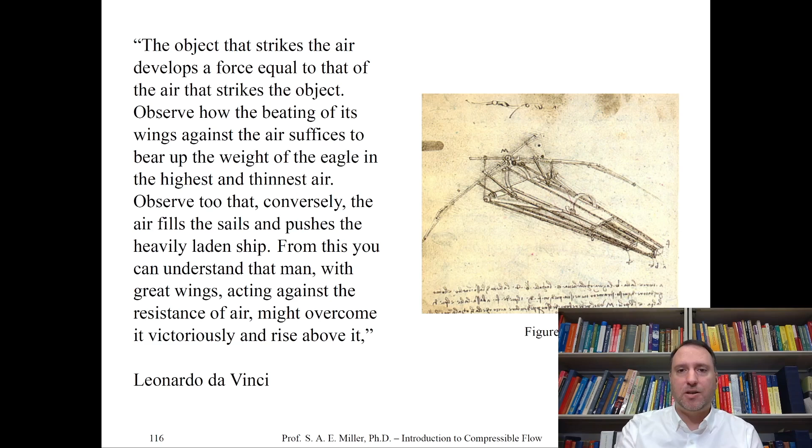Remember, let's define fluids. A fluid is any substance that deforms continuously under a shear stress. Any matter that deforms continuously under any shear stress is a fluid, by definition.

Here, in this class, fluids consist of liquids, gases, and plasmas. We'll talk a little bit about plasmas, very little, but our class is mostly focused on gases, which have higher compressibility, as we discussed, the compressibility factor tau.

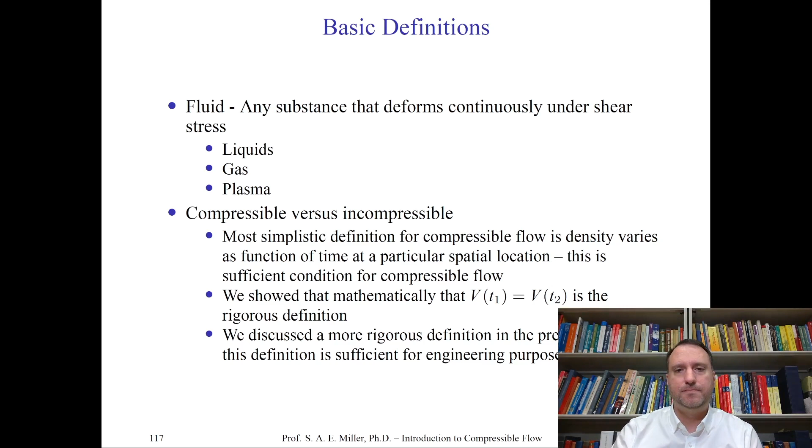Generally, liquids, just generally, not always, have much less compressibility, and so we won't consider liquids too much in this class. Now, the most simple definition of a compressible flow is that density varies as a function of time at particular spatial locations.

This is a sufficient condition for the compressibility or incompressibility of a flow. But we showed in the previous class the most rigorous definition is that a fluid parcel maintains its volume as it is deformed in space.

You can imagine that any infinite choices of fluid parcels in a fluid flow through space and time, which do not change their volume, would be considered an incompressible flow. We will not be interested in this assumption at any point through this class, except for a few examples done to counteract our fundamental ideas.

In the previous class, we showed that the volume at time 1 equals the volume at time 2, which indicates an incompressible flow for fluid parcels. That doesn't mean the control volume isn't changing about the fluid parcel. Informally, you can say the density is changing in the fluid. We discussed more rigorous definitions previously, but this will be sufficient for the rest of the class, though it's not very rigorous.

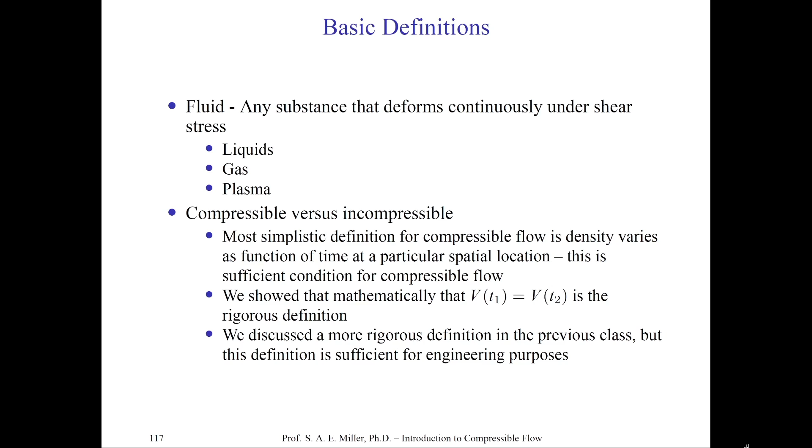Now let's talk about supersonic versus subsonic flows: supersonic, transonic, and subsonic flows. Remember, specific regions of the flow field might have the property that M is greater than u over c. Here, Mach number is defined as the local speed of the fluid divided by the local speed of sound.

There's also a global Mach number, which might be the speed of the aircraft divided by the speed of sound at the altitude of the aircraft in the undisturbed atmosphere. So mind these definitions: M equals u over c, where u is the speed of the fluid and c is the speed of sound at one point. Therefore M can change anywhere in the fluid, spatially and temporally.

If M equals 1, this is the so-called transonic condition, meaning M equals 1 equals u over c, so u equals c at M equals 1. This is the singular point between subsonic and supersonic flow.

Subsonic flow is where M is less than u over c, and supersonic flow is where M is greater than u over c. Typically, we do not discuss negative Mach numbers; Mach number is a scalar positive quantity.

Transonic flows may also exist anywhere M is not equal to 1. In fact, transonic flow might be seen as a class of flows with supersonic and subsonic regions mixed in the flow field. There are usually trivial solutions where M equals 1 everywhere in the governing equations, the transonic condition. We'll find later how difficult transonics is, requiring special mathematical attention.

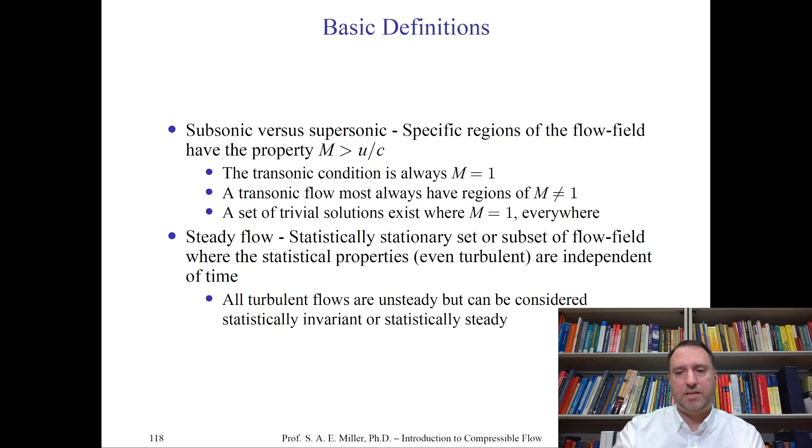Let's now look at the idea of viscosity. Viscosity is the shearing force when you shear a fluid—it's the resistance of the fluid to shear. Of course, viscosity plays an important part in the stress tensor, which we defined not long ago.

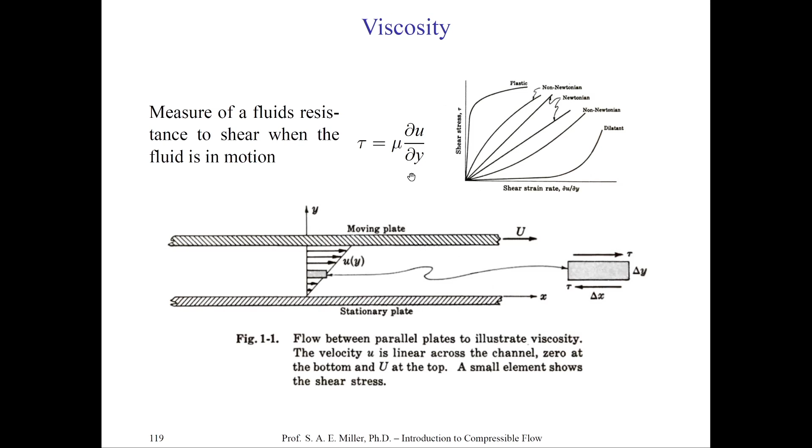Let's talk about the difference between laminar flow, transitional flow, and turbulent flow. Laminar flow is like a laminate. Perhaps you've seen wood laminate, or you've looked at very slow speed fluids and put in some dye, and you see that the flow moves like a laminate. You can imagine having parallel parts of fluid in parallel volumes, and they just move across each other without ever crossing each other's streamlines. This would be an example of laminar flow.

It's smooth, non-chaotic, and there's no real fluctuations in it. That's laminar flow. We might draw parallel streamlines in a uniform flow without fluctuations, and that would indeed be laminar flow. So you can have high-speed laminar flow or low-speed laminar flow.

Now, sometimes laminar flow profiles have inherent instabilities in them. Just like a dynamical system might be unstable and go into chaotic motion eventually, a fluid can be unstable. That is, the laminar profiles of velocities might contain instabilities, and a perturbation, like a small wave or vibration, will send the system into a chaotic state, which is turbulence.

So flow going under an instability from laminar to turbulent, or alternating between laminar and turbulent states, is called a transitional flow, because it's transitioning from laminar to turbulent flow.

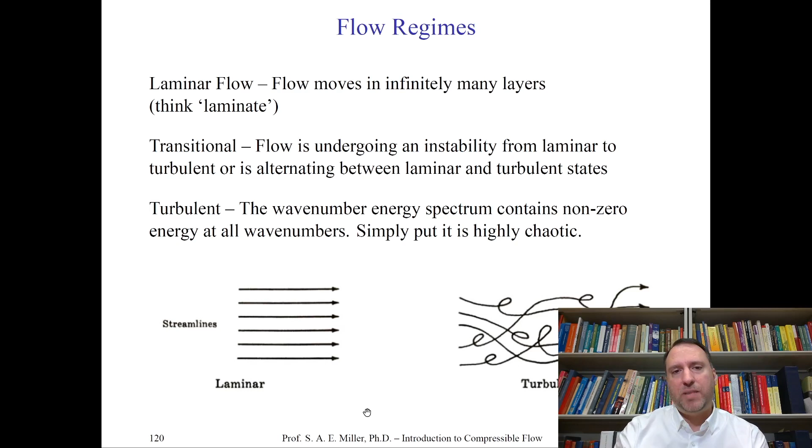A turbulent flow might be defined as one which is fully turbulent when the wave number energy spectrum contains non-zero energy at all wave numbers.

Imagine I have a turbulent velocity field, and I take a Fourier transform in the x, y, and z directions. I can now plot the Fourier transformed energies in wave number space instead of physical space. If they are non-zero, I can show that the flow is turbulent. This is a very mathematical definition.

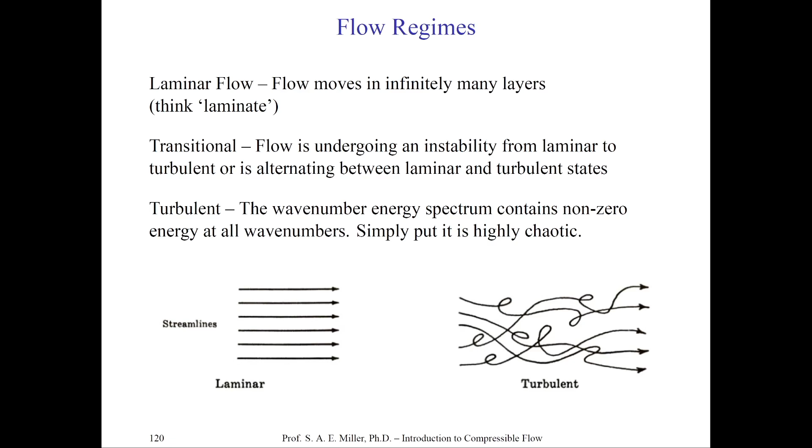A simpler, more physically understandable definition is that turbulence is highly chaotic. You probably know what it is: cigarette smoke, clouds in the sky, water in rivers, and sometimes the airflow in our lungs and breath are all turbulent flows. Aerospace engineering is no different—in fact, we should expect most aerospace flows to be turbulent in nature, and this is quite difficult to handle.

Generally in this class we'll look at flows with very low to no turbulence. The subject of turbulence will be treated in other classes, perhaps at the graduate level. We'll study these flows assuming little to no turbulence so we can solve these equations. Generally there are no analytical equations for turbulent flow, so we'll try to develop analytical equations and methods for flows which are not turbulent.

There's another classification called external versus internal flows. An external flow might be one which is unbounded, while an internal flow is one bounded by boundary conditions, such as solid walls.

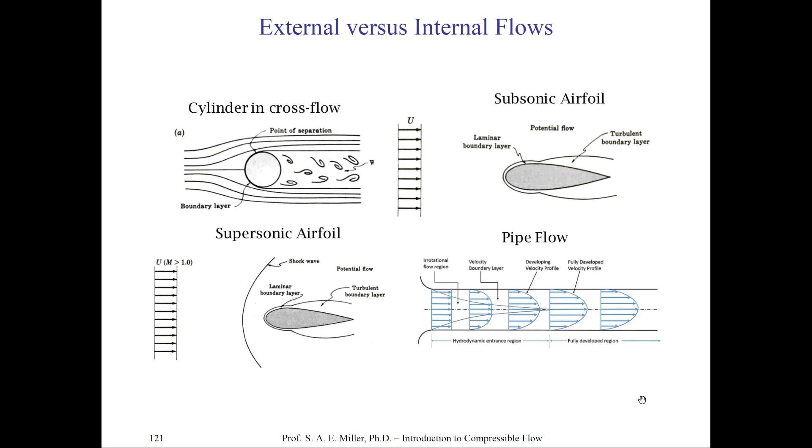You can probably think of many examples of internal and external flow. But at the end of the day, the equations of motion are exactly the same between internal and external flow—it's just that they have different boundary conditions, which gives them unique properties in the final solution of the field variables.

Let's review our differential form of the continuity equation, the conservation of mass equation developed in the previous class as equation 73. Let's read it together: partial rho partial t plus partial xi of rho ui equals 0. This means the change of density in the fluid at a point with respect to time is balanced by partial xi of rho ui—almost like the divergence of rho ui balanced by the time rate of change of mass in the fluid.

We can also write equation 73 from Einstein notation into vector notation as 74. You can see partial xi of rho ui is nothing but nabla with the inner product of rho u in the second term of 74. We can expand this into Cartesian form or any coordinate system we desire—for example, 75 is the Cartesian form of 74: partial rho partial t plus partial x of rho u plus partial y of rho v plus partial z of rho w equals 0. That's 73 written in Cartesian form as 75.

What does this physically mean? The first term is the time rate of change of density at a point, plus the derivative in the x direction of density times velocity in the x direction, plus the derivative of density times velocity in the y direction, plus the derivative in the z direction of density times velocity in the z direction—all equal to zero. Now let's make the incompressible assumption.

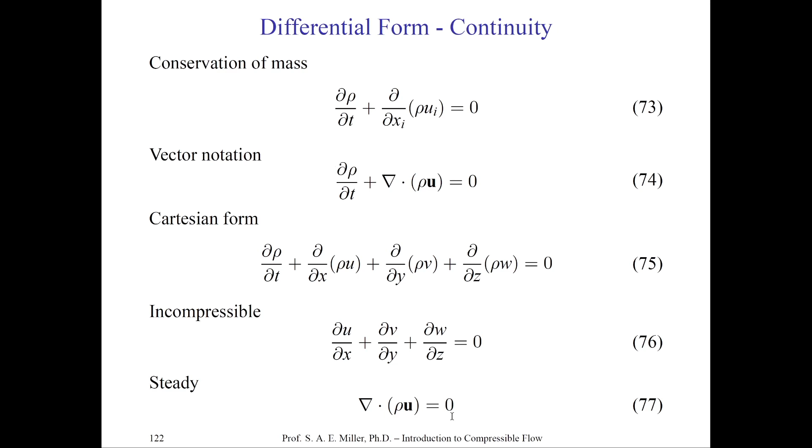We can then further state a steady assumption which is compressible. The steady compressible assumption would be nabla dot rho u is 0, equation 74, crossing out the time derivative because it's steady, so rho can indeed be changing. That's a steady flow, giving us nabla dot rho u is 0. So steady compressible flow and incompressible unsteady flow are indeed two different things.

Now let's return to the momentum equation. Let's show the stress tensor on a particular fluid, pictured on the left. The particular viscous stress tensor is written on the right, with components 1 to 3 for i and 1 to 3 for j. It's also symmetric, as we stated in the previous class.

On the x face of the volume, we have the 1,1 component. On the x face in the y direction, a shear component would be 1,2. And on the x face, we would have a shear component in the z direction—that's 1,3 in Cartesian coordinates.

You can also see the second and third row are the normal stresses along the trace of the tensor, and the off-diagonal terms are the directions in the x, y, and z directions respectively. So the second row is for the y face, and the third row is for the z face. It's simple to draw and remember once you do it once.

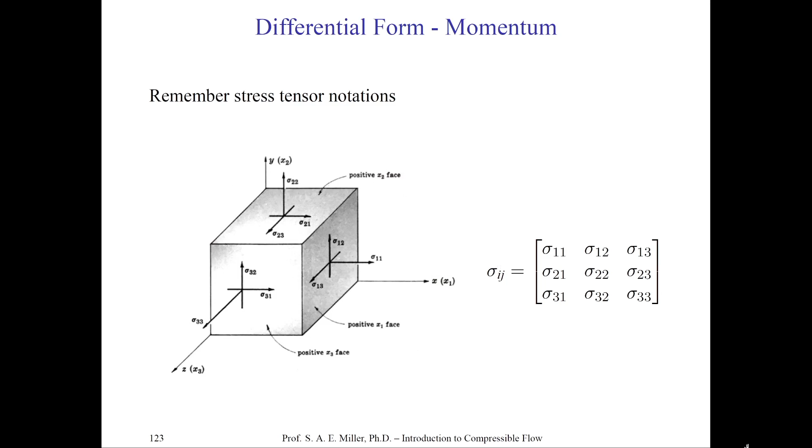Now let's look at the momentum equation in its full form. Naturally, we relate the stress tensor through the first and second coefficients of viscosity in the equations of motion. Here we are in the full compressible differential form of momentum, written in equation 78, in Einstein or index notation.

Rho times the material derivative—it's a vector equation for i equals 1, 2, 3, for the first three directions respectively—is equal to rho times partial ui partial t plus uj partial ui partial xj, which is equal to the right-hand side stress terms plus body forces.

Here we define the stress tensor, which we called Tij in the last class, and here it's sigma ij, as equation 83. Once again, we've written it as the negative of the internal stress, which is pressure, static pressure, times the Kronecker delta function—which is 1 for i equals j and 0 for i not equal to j—plus the first coefficient of viscosity times these velocity terms, plus the second coefficient of viscosity zeta times the Kronecker delta function of partial uk partial xk.

Notice, if we have incompressibility, then partial uk partial xk in the first and second terms of the viscosity are indeed 0.

Now look at the Cartesian form expanded. If we take equation 78 and expand it out for the x, y, and z directions, just like we did for continuity—which, of course, is scalar, but now there's three equations in three dimensions—we can write it out in this full form. For example, the x momentum equation is equation 79, y is 80, and 81 is z.

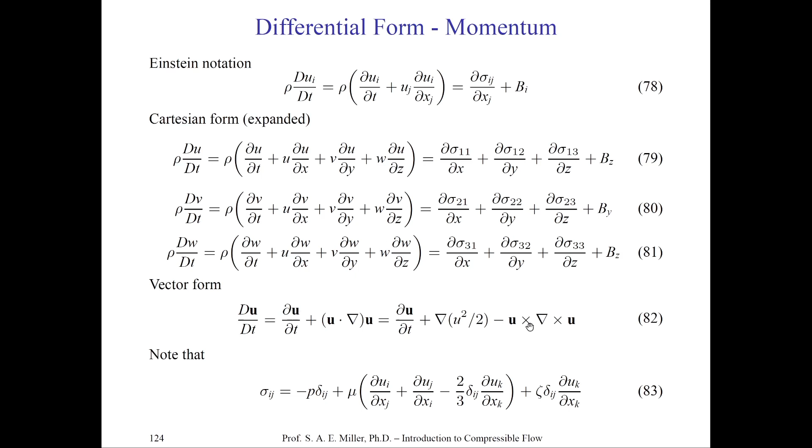You can try and write this out into Cartesian form yourself if you so desire.

Let's now look at the differential form of energy, written for specific energy, little e, which we derived in the previous class. We have rho times the material derivative of e equal to a heat transfer term and body force terms, plus the viscous stress terms doing work on the fluid. I've written down the definitions of these terms here, and I recommend you take a second to follow them.

Once again we made Fourier's approximation, Fourier's law, which works well for many different types of fluids, where kappa, of course, is a conduction coefficient.

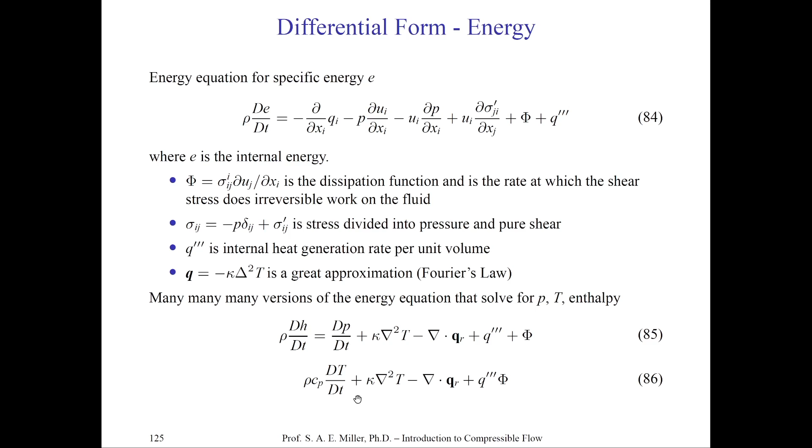There are so many versions of the energy equation. We can write it in terms of enthalpy, pressure, temperature, total energy, or specific energy. I've written two more in differential form, equations 85 and 86, for enthalpy, pressure, and temperature respectively, for your convenience. Take a few minutes and study this slide, paying special attention to the heat transfer term.

And the stress terms. We can also write differential forms for entropy, another law of thermodynamics. This is an inequality law from thermo, the second law of thermodynamics. For a calorically perfect gas and a perfect fluid, we'll say the flow is isentropic, and we'll get into these definitions later - it could be reversible. Anytime you have viscous effects, heat conduction, or heat coupling, the flow will be irreversible, and the entropy law will be written as an inequality.

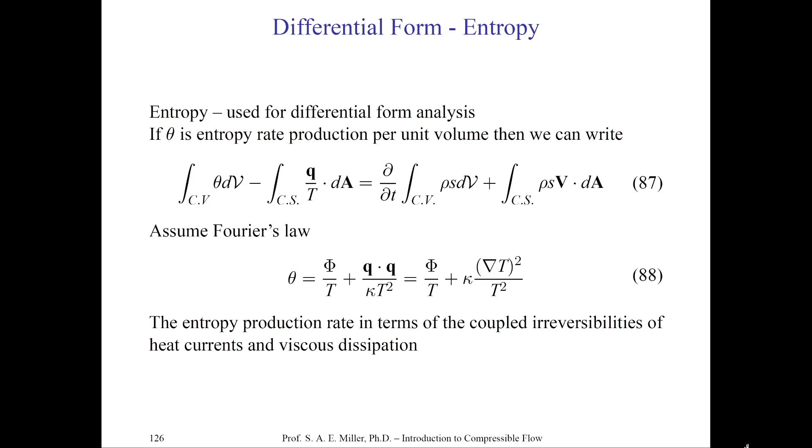So it's not always useful for solving flow equations, but in this class we'll be able to use the entropy equation a couple times as an equality, making the assumption that viscosity is zero.

Let's review the full Navier-Stokes equations once again. We have continuity, momentum, and energy written here - the compressible full Navier-Stokes equations with the energy equation, but no gas law. These are the most important equations because they govern all fluid motion we're looking at in this class and in most classes, except for rarefied flows. We've already talked about these equations in the previous class. At this point you can be expected to write these out in Cartesian form and understand each particular term and its meaning.

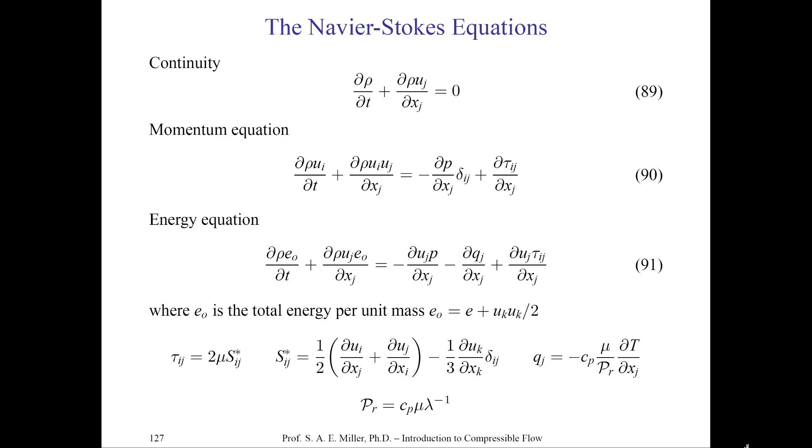Let's start using the following definition for shear stress. We'll say the shear stress is partial uj tau ij over partial xj. You can see this is a type of normalized force - it's a shear force for tau where i is not equal to j.

We can also, from now on, define a total energy, which we'll call E naught - naught meaning sub-0, written interchangeably. In equation 93, the total energy per unit mass is the specific internal energy plus the kinetic energy, that's ui squared over 2. Here we see two i's in a single term, meaning we sum from 1 to 3, so that's u squared over 2 plus v squared over 2 plus w squared over 2, expanded out.

We also formally define the shear stress term. Tau ij is 2 mu times sij, and sij is a half of partial ui over partial xj plus partial uj over partial xi, minus a third of partial ui over partial xi times delta ij, where delta ij is the Kronecker delta function. We also define the heat flux terms with Prandtl number PR and lambda as thermal conductivity.

The ratio of specific heats, which we'll use throughout this class, is gamma. Gamma equals Cp over Cv, where Cp is the coefficient of specific heat at constant pressure, and Cv is the coefficient of specific heat at constant volume. This should be completely familiar from your thermodynamics classes, I hope.

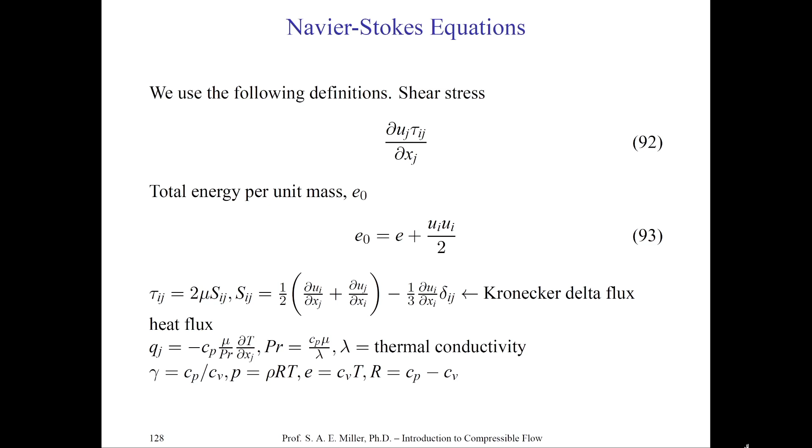Let's turn our attention completely now from the Navier-Stokes equations to acoustics. It is true that all acoustic phenomena that we typically study in aerospace engineering are completely contained in the Navier-Stokes equations, but we'll treat acoustics as its own independent subject. In fact, we can try to derive acoustic equations independently from Navier-Stokes, but we can also take Navier-Stokes equations and derive the acoustic equations more rigorously from the continuous deformation of a Euclidean space.

Let's make some notes about acoustics now. Acoustic waves are extremely important in the aerospace engineering field, especially in compressible flow and fluid dynamics. As I mentioned, the equations of motion we developed completely contain all acoustic fluctuations as part of the solution of the full nonlinear system of equations. We might ask ourselves then, do acoustic waves exist in incompressible fluid? This is something I want you to think about for yourself for a little bit.

We might view and define an acoustic wave as a compression or expansion wave of a fluid. An acoustic wave, or waves in fluids, generally compress the flow or decompress it, which we call expansion. An expansion of a fluid is the opposite of a compression. So fluids are compressed and expand. Through this class, you'll see a theme of wave science where we compress fluid and expand it through particular phenomena like shock waves and expansion waves, respectively.

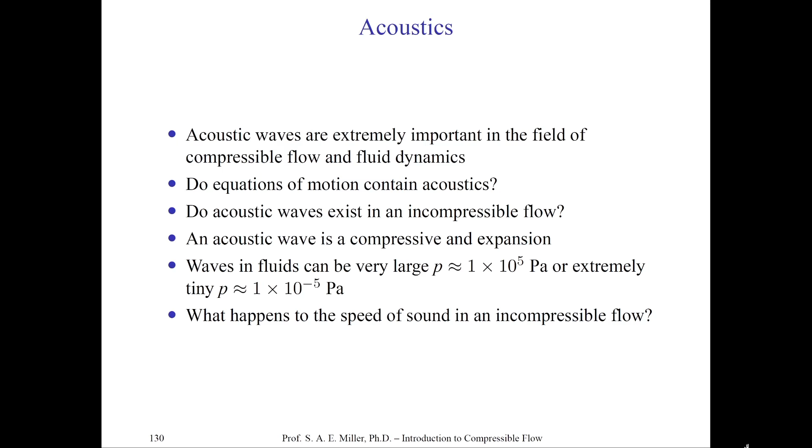Now, what happens to the speed of sound in an incompressible fluid? Would it be 0, infinity, or a finite value?

Let's turn our attention to the Boltzmann equation, and we'll return to acoustics in later classes to try to explain the formation of particular flow phenomena. In Boltzmann theory, which is similar but different than Navier-Stokes theory, we might also define a distribution function f, just like we did way back in the beginning of Navier-Stokes.

We might call that distribution function such that f of 2 volumetric integrals over x and v is an average number of particles contained in a volume element defined by the cube x of a fluid parcel, and a velocity space element we'll call about v at time t. So there's now a new idea of a velocity space element and an actual physical volume. We can then define the number of molecules in a gas as n at any x and t as an integral over f of the volumetric integral over v, the velocity space element.

We can then once again define density as the particular mass times the number of particles, as each particle has the same mass, which is simplified for now. Of course, this is not true in gases where molecules have different masses, like nitrogen and oxygen. We can also define a velocity, which is 1 over the number of particles times the integral of f, which gives us an ensemble average velocity v. So here is the number density of the particles, and m is the mass of a single particle.

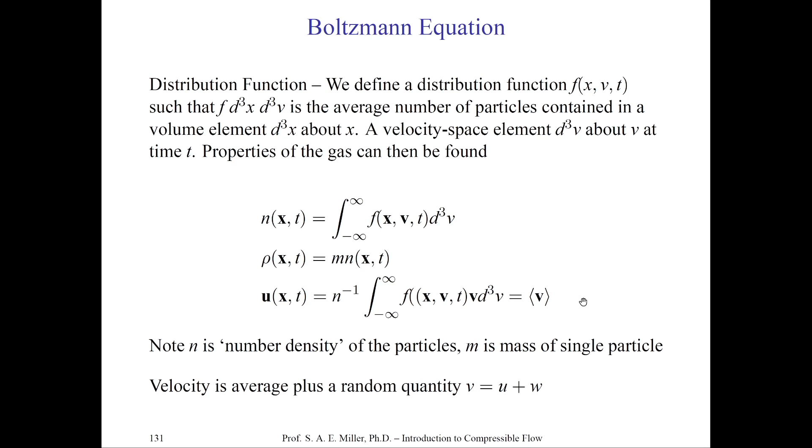Our velocity is an average plus a random quantity. So the average is u, and w is, of course, a random quantity. This is the idea of the formation of the Boltzmann equation, which is an alternative to Navier-Stokes theory, which you should be aware of in this class, but we will not be using the Boltzmann equation.

For flows with no collisions, we can derive the so-called Vlasov equation. This equation was derived by Vlasov based on Boltzmann's theory, and might be viewed similar to transport theory for any particular f. Here a is an acceleration, and f is a force acting on the particles, while m is the mass.

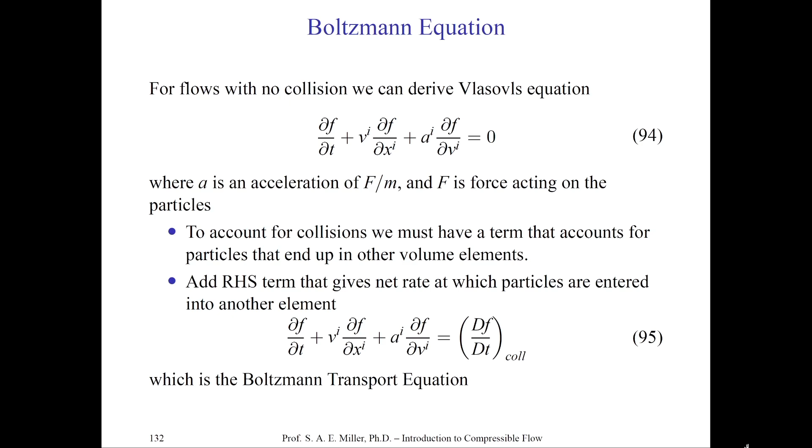Particles might collide, and we might have a term that accounts for particles ending up in other volume elements, if we distribute our volumes over a large space to model a fluid. The right-hand side gives the net rate at which particles enter another element. So we take Vlasov's equation and add a right-hand side to account for particles transported from one volume element to another, with a subscript for collisions. This is the famous Boltzmann transport equation, used to model fluids.

We might model collisions through an integral, accounting for binary collisions between two particles for simplicity. We can write the right-hand side of the Boltzmann transport equation as the net rate at which particles enter the so-called phase space element under consideration, written as R_in minus R_out. R_in and R_out are the rates at which particles are scattered in and out of a volume in phase space. We can then write R_out as equation 97, for example.

What's important here is approximating R_out by taking the phase space and physical space integrals times a factor b, which is a range of impact parameters, and Q, which is nothing but the difference of the velocities before and after the impact.

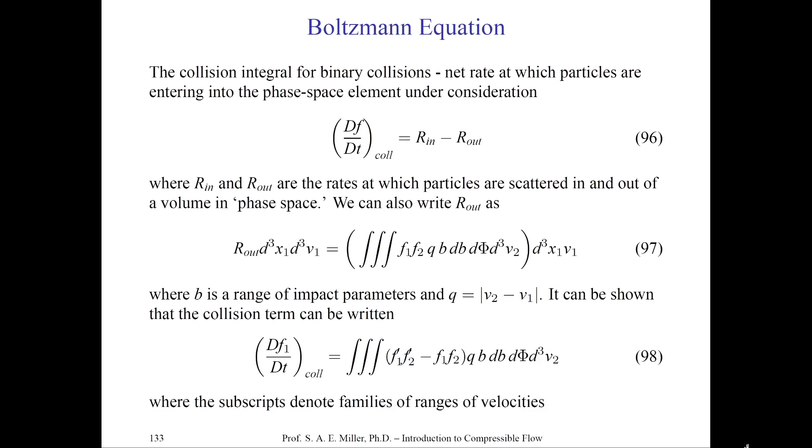There's also a collision term, written in equation 98 as dF1/dt for collisions, which is the right-hand side of equation 95. We can write a similar equation for 97 with R_n, where these represent families or ranges of velocities of the collisions.

Now, if we take the Boltzmann equation with Vlasov and the right-hand side, and take moments of it, we can exactly recover the Navier-Stokes equations. I won't show all the steps, but I want you to be aware that you can use Boltzmann's theory to completely recover Navier-Stokes theory, putting it on a physical basis instead of a purely mathematical basis like Navier-Stokes' original derivation.

For example, we can take the moment of the top equation by integrating on the left and right-hand sides, then differentiate with respect to v and f, letting f go to 0 and v go to infinity, so q and f vanish, giving this equation with respect to the number of particles. We then set q equals m, for instance, to recover the equation at the bottom of the page, which is the compressible conservation of mass equation from Navier-Stokes.

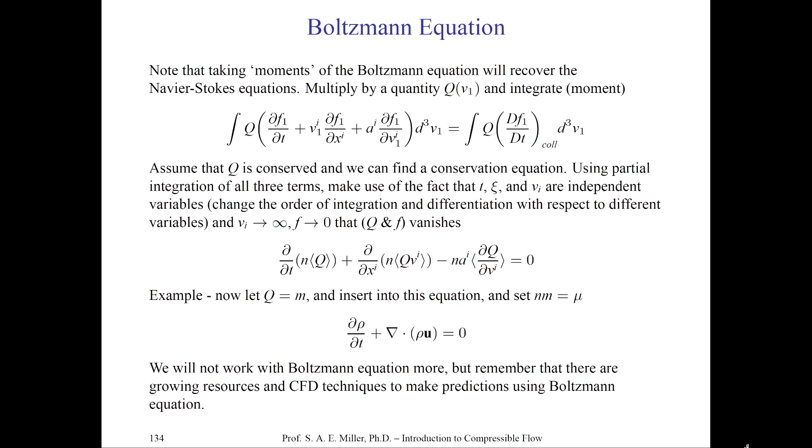We can also let the middle equation take different values of q for mass, momentum, and energy, and exactly recover the momentum equations of Navier-Stokes. So some people today solve the Boltzmann form of equations because it models Navier-Stokes, but most people in practice use the Navier-Stokes equations directly. This is an aside to show you that you do not necessarily have to use Navier-Stokes; it's just the most common and useful technique.

You might ask yourself, who is Ludwig Boltzmann? Here's his picture. He was born in 1844 and passed away in 1906, an Austrian physicist and philosopher. His greatest achievement was probably developing the entire field of statistical mechanics, which explains and predicts how atoms, through properties like mass, charge, and structure, determine the physical properties of matter, e.g. viscosity, thermal conductivity, and diffusion. You can use statistical mechanics and quantum mechanics today to find and derive these types of properties that appear in the Navier-Stokes equations for different fluids.

And so it's a completely closed and mathematical and physical subject. He also credited the idea of entropy, which is written on his grave.

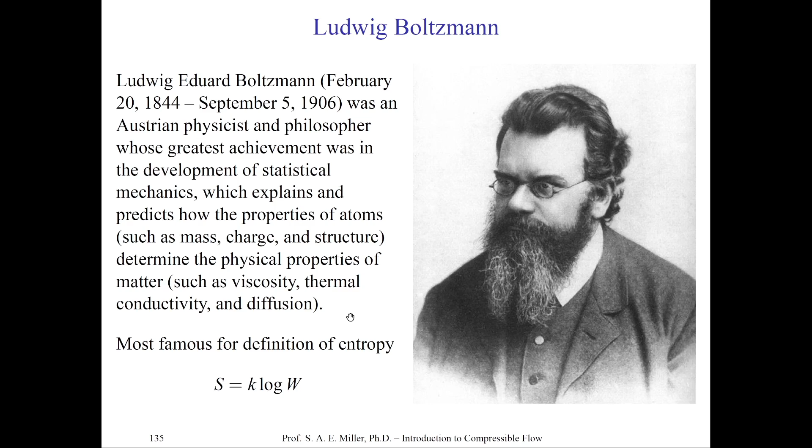The exact definition of entropy, which you might not have learned in your thermal classes, is S equals K log W. Here, W is the number of states of the system, possible states of the system, K is the Boltzmann constant, and S, of course, is entropy.

Dr. Villani is a very interesting person, and I recommend checking out his blog for some interesting reading.

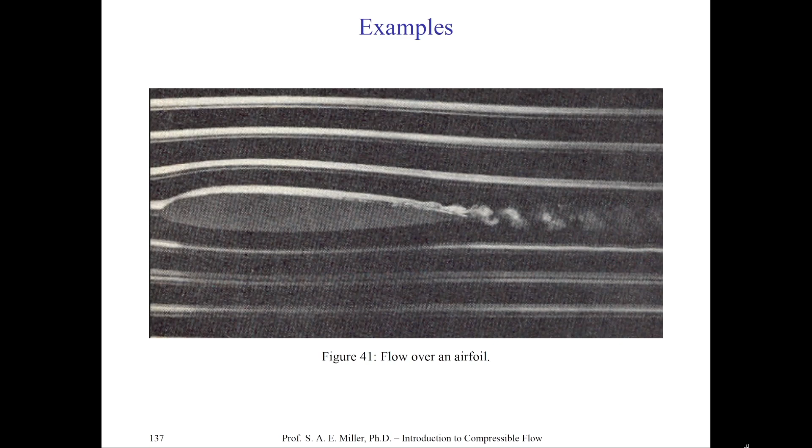So in this one picture, we see a lot of things happening. First, we don't know if the flow is incompressible or not, because we have no information about it. But we can see regions of flow which are considered to be stationary or statistically steady. We see regions of attached flow and detached flow, we see a turbulent wake, and we see a transition. All things which we observed in this class and definitions. It's nice to see some pictures and examples to put our work on a theoretical and physical basis.

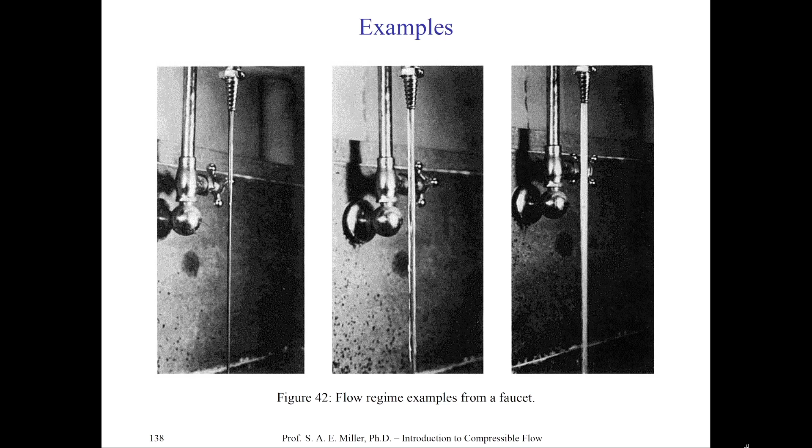The figure on the right, of course, is a turbulent flow. We increase the velocity of the flow, and the Reynolds number is higher beyond some critical value, and we see the stream where basically the turbulence within the water is diffracting all the light, and it doesn't go through the beam. You can try this in your kitchen next time you go to the faucet or a restroom, and I recommend you try it for fun. You can start to recognize in your everyday lives instances of laminar flow, transitional flow, and turbulent flow in nature and in physics.

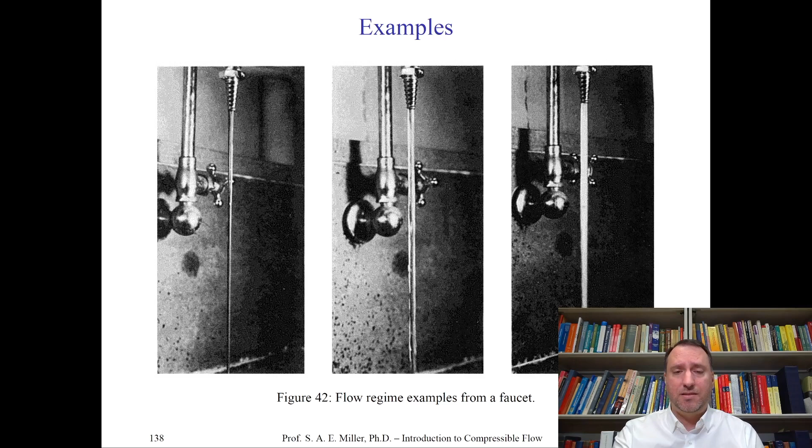And we'll be dealing with this throughout the class. Let's look at one particular example.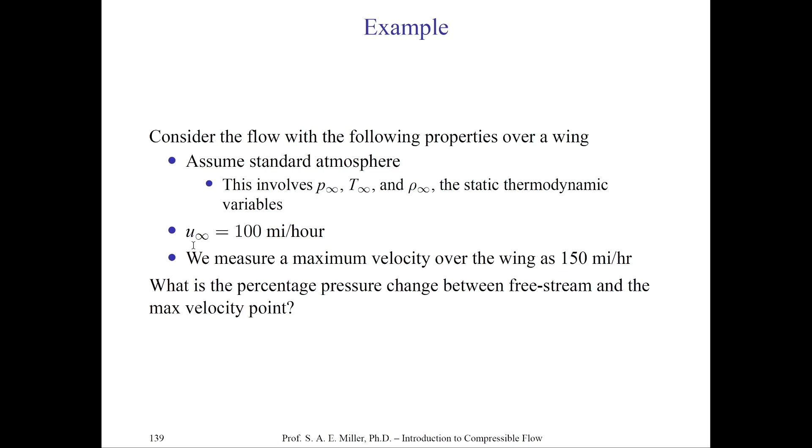Now let's say the airfoil is traveling at 100 miles per hour, and we'll say that the airfoil velocity is U sub infinity, the ambient velocity of the airfoil relative to the fluid. Or we could say the airfoil is stationary and the fluid is coming at it at 100 miles an hour, like we showed two figures ago.

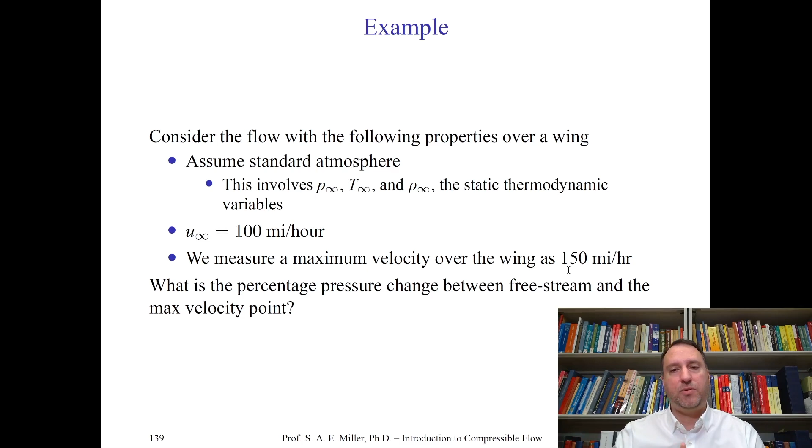Now, somewhere above the airfoil we measure a maximum velocity of the fluid over the wing at 150 miles per hour. So the flow over the top of the airfoil has accelerated from 100 to 150 miles an hour at some point. We'd like to ask what percentage change occurred between the free stream pressure P infinity and the max velocity point U. So U, the max velocity with no subscript, is 150 miles per hour. What is the pressure P at that location?

Let's look at the solution. Obviously these air speeds are very low, and we'll assume the flow is incompressible. Why? Because we can calculate the Mach number based on the temperature and speed of sound and ambient Mach velocity.

Let's apply the so-called and famous Bernoulli equation. Remember, from your previous class, you should recall the assumptions in the Bernoulli equation and how it was derived from the momentum equation alone. This equation is only valid for incompressible flow, so don't use it in this class after this example. The point of the example is to show error, even at low velocities.

The famous equation can be written as P1 plus a half of rho U1 squared equals P2 plus a half of rho U2 squared—that's Bernoulli's incompressible equation. We'll derive the compressible form later in this class, so you don't have to make this kind of error again.

We can rearrange the equation so we have a pressure difference: P2 minus P1 is a half of rho times U2 squared minus U1 squared. Here the subscripts 2 and 1 represent states 1 and 2. State 1 we replace with the ambient value sub infinity, and state 2 is the maximum value.

At standard sea level we might look up rho infinity as 0.002377 slugs per foot cubed. And indeed, 60 miles an hour is 88 feet per second, so we converted. This yields U1 equals 100 miles an hour, which is 147 feet per second, and U2 is 220 feet per second.

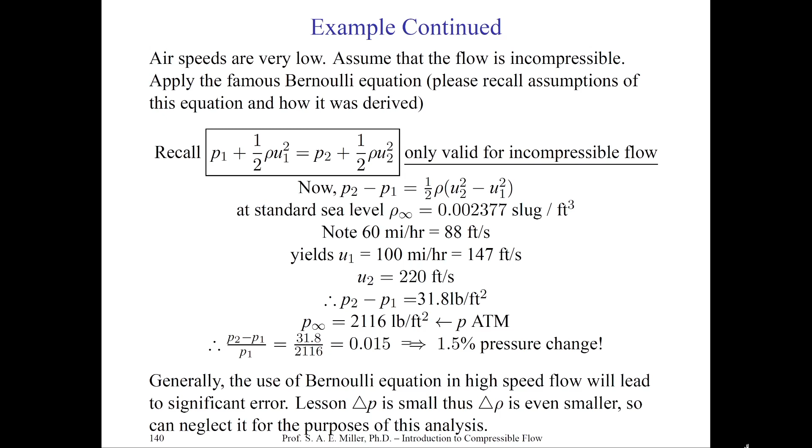We will look at these errors for incompressible versus compressible pitot tube measurements at high-speed subsonic flows, to show you how the error grows with increasing flow speed or Mach number. Remember, unlike incompressible flow, compressible flow will have kinetic energies which play a huge role in the compressibility and dynamics of the flow.

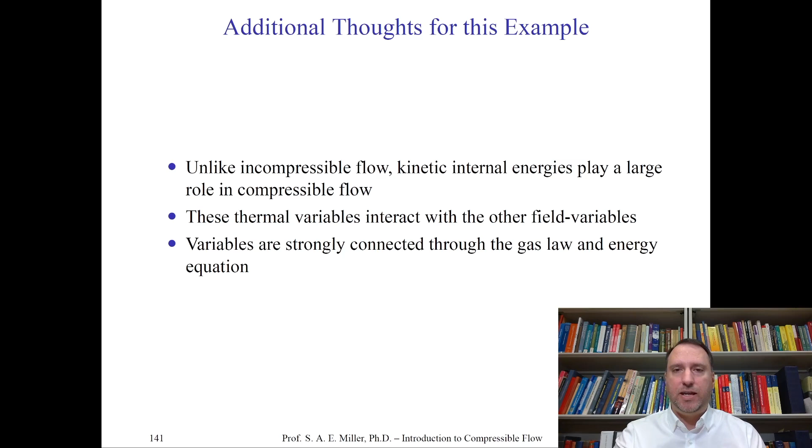The so-called thermal or thermodynamic variables will be interacting through terms in the Navier-Stokes equations with other field variables like densities and velocities, etc. All variables are strongly connected through the gas law and energy equation, which we cannot neglect in a compressible flow. Compressible flows require excellent gas laws and the use of the energy equation, which is the first law of thermodynamics.

One might say, jokingly, that a perfect fluid, that is Eulerian, deserves a perfect law, and this is where the perfect gas law comes in. A perfect gas law is one in which the intermolecular forces are neglected, which of course is an assumption, but it works for a wide range of velocities at standard atmospheres.

For example, we might write the static pressure, which is the internal stress of a fluid, times its specific volume, is equal to the gas constant times the static temperature. V is specific volume, R is gas constant, which changes for each fluid. T is the static thermodynamic temperature, and P is the static thermodynamic pressure.

Notice I'm saying static, static, static, static. Later in the class, we'll introduce the idea of total or stagnation pressures, temperatures, densities, speeds of sound. So be careful, if we just write T, P, or rho without any particular subscript, you can assume that we're using a static value. Remember that.

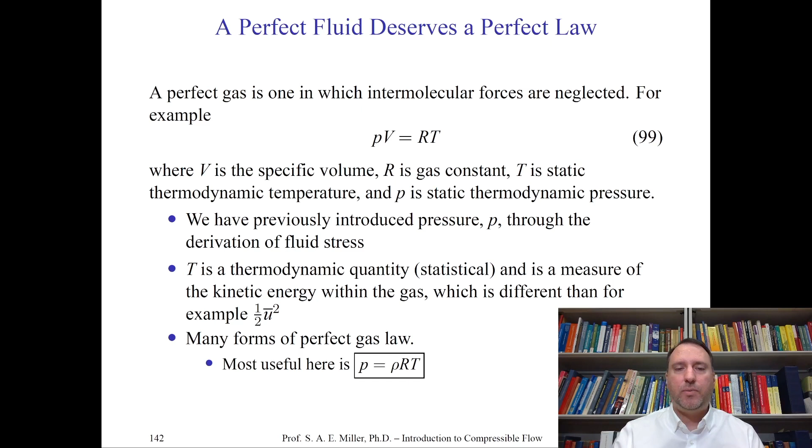Now, we previously introduced the static pressure through the derivation of the fluid stress. Indeed, that is where the static pressure is defined and comes from. It can be physically interpreted as the time average force over a given unit area on a particular wall or within a particular surface within the fluid.

Temperature is a thermodynamic quantity, but it's really statistical. Indeed, it's a measure of the kinetic energy within the gas, which is different than the energy due to the bulk motion of the gas or fluid as it moves through space. For example, the kinetic energy is due to temperature, which is just measured with, like in Kelvin or Rankine. This is different than, say, 1/2 U bar squared, remember, which is the idea of the kinetic energy of the motion of the fluid. There's other types of kinetic energies which we might discuss later in class.

The most useful form of this particular law is P equals rho RT. Why is this? Because, of course, we have P, rho, and T formed and present directly in the equations of motion. The equations of motion don't typically have an explicit form for a specific volume, but that's really like an inverse of density with respect to mass. But we wouldn't want to have mass because that's a derived quantity anyway from the field variables. So P equals rho RT, of course, is the most important form which we'll use throughout the class. Remember that equation.

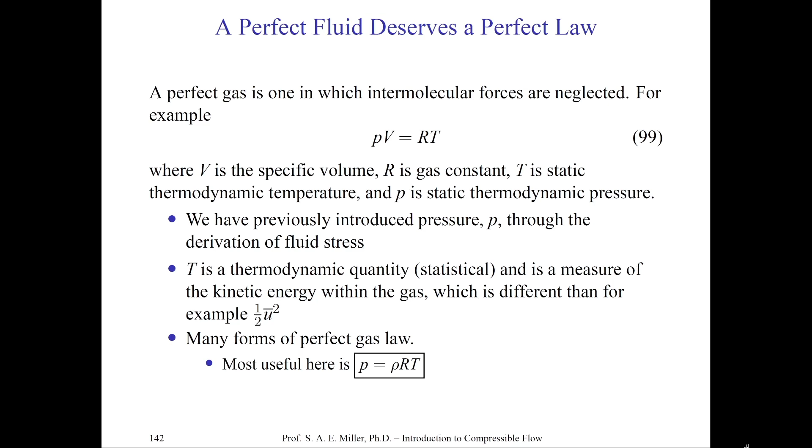Let's talk about particular gas constants like R, which appear in the gas law. Here, the universal gas constant is 8,314 joules per kilogram mole Kelvin. Remember that number. If the equation deals with particular masses, like air, we might write 287 joules per kilogram Kelvin. So when we use the ideal gas law, P equals rho RT, and our gas is air, we'll simply use 287 joules per kilogram Kelvin in the equation. And don't worry about equation 100, which is the universal gas constant.

Now, if we're dealing with particles and the Boltzmann set of equations, then we would use equation 102, and we finally define the Boltzmann constant, which is approximately, and we have much better precision today, 1.38 times 10 to the negative 23rd joules per Kelvin.

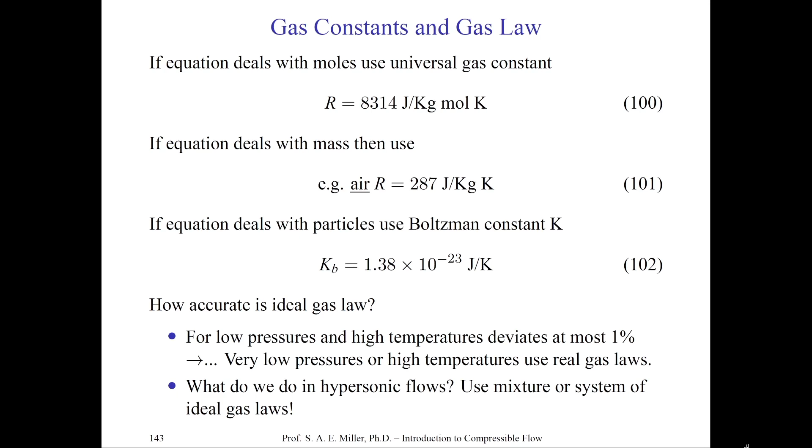We might ask ourselves, how accurate is the ideal gas law? Indeed, later in this class, when we look at hypersonic flows, we'll witness the breakdown of these assumptions for highly compressible flows. For low pressures and high temperatures, the ideal gas law will deviate about 1%. So for very low pressures and high temperatures, we might have to use real gas laws. For very high-speed flows, we need a mixture or system of gas laws, real gas laws, or chemically reacting flow, or just dump them all together because we have a plasma.

We also need to remind you from your basic thermodynamics classes the idea of internal energy and enthalpy. We'll use these variables and terms throughout the rest of the class.

E is internal energy per unit mass of the fluid. It consists of the kinetic, rotational, and vibrational energies of the system of molecules. Usually we can write E as a function of temperature and specific volume. H is enthalpy per unit mass, which we'll use when looking at energy equations for certain problems. It's also mainly a function of temperature and pressure.

If our flow does not have a chemical reaction, like in a combustion chamber of an aircraft engine, we call it non-chemically reacting, or a non-reacting flow. Therefore E and H are only functions of temperature, which is lovely, and that's how we'll work with this class mostly.

So internal energy per unit mass and enthalpy per unit mass, E and H respectively, are only functions of temperature, equations 103 and 104. If Cv and Cp are changing, we would have to write E and H as integrals of Cv dt and Cp dt respectively. We can also write them in differential form, and sometimes we can even write E equals Cv T and H equals Cp T when we make the calorically perfect gas assumption. This should be reviewed for you from thermodynamics.

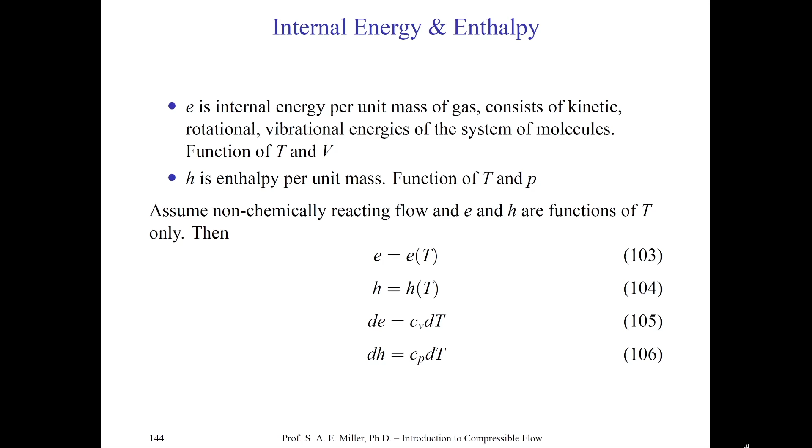Let's return to the ratio of specific heats. We define Cp and Cv as dH over dt at constant pressure, and dE over dt at constant volume, which are generally constants if we make the calorically perfect gas assumption. Then we can write E equals Cv T and H equals Cp T with these assumptions. This is the so-called calorically perfect system of equations for a perfect gas.

As a general rule for air in aerospace engineering, or flows about Earth, if the flow has a static temperature of less than 1,000 Kelvin, we'll say it's a perfect gas. If the static temperature is above 1,000 to 2,500 Kelvin, the flow is thermally perfect, and we'll relax these assumptions. If the flow is greater than 2,500 Kelvin, which can easily happen in re-entry vehicles, there will be chemical reactions and maybe even conversion of the gas to a plasma, requiring difficult mathematics of electromagnetics, chemically reacting flows, dissociated systems, and ionization.

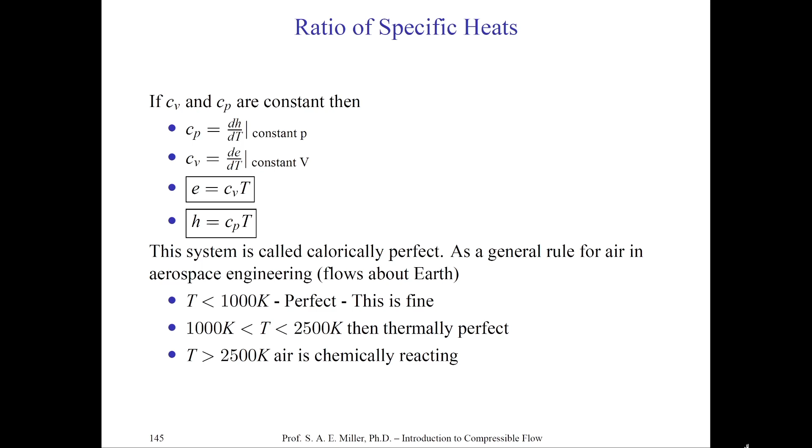For thermally or calorically perfect gases, we can use the following algebraic equations: Cp equals gamma R over gamma minus 1, where R is the gas constant and gamma is the ratio of Cp over Cv. And Cv equals R over gamma minus 1. You should remember these equations too.

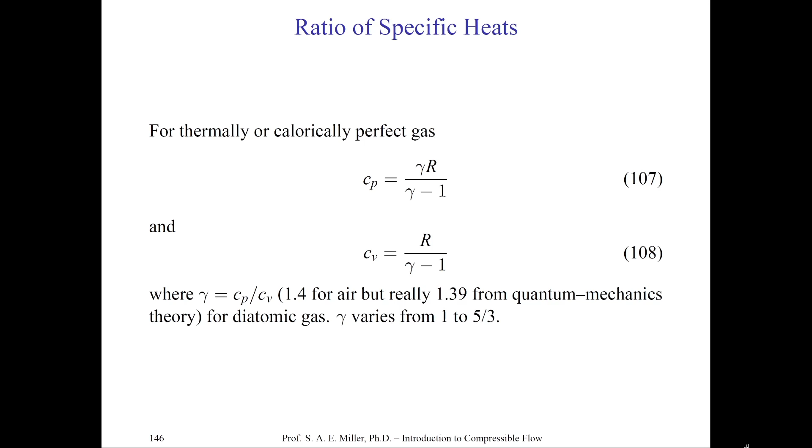For air in this class, gamma is 1.4 — technically it's probably 1.39, but whatever. Gamma varies for different gases like helium, air, nitrogen, and mixtures, ranging between 1 and 5/3. In the hypersonics part of the class, we'll use gamma equals 1 to recover Newtonian theory of aerodynamics, which is quite beautiful. But generally we'll say gamma is 1.4 by default unless specified otherwise.

In this class, we looked at and reviewed the Navier-Stokes equations and their terms expanded out in Cartesian form. You should be able to expand these equations in Cartesian form and use them in both differential and integral form, from Reynolds transport theory to the differential equations.

We also looked at the alternative formulation of the Navier-Stokes equations from the Boltzmann equation. If you take the Boltzmann equation from the Vlasov equation and take moments, setting Q equal to 1 or m or momentum, you can recover Navier-Stokes exactly from gas kinetic theory. The purely mathematical way of deriving Navier-Stokes can be found from mechanics and statistics, so we believe the Navier-Stokes equations remain a wonderful and well-proven model of fluids.

That's why almost all the research we do today in aerospace engineering and other fluid fields is based on Navier-Stokes, unless the gas is not a continuum, in which case we might have to use the Boltzmann equation because the Knudsen number is too high, as we discussed in a previous class.

We also discussed the basics of acoustics, which we'll return to in following classes. Then we looked at the incompressible Bernoulli equation — never use this equation again in this class. If you always use the compressible form, you'll never have to worry about whether you're using it correctly or not.

We also basically reviewed the simple ideas of thermodynamics: calorically perfect gas, thermally perfect gas, the perfect gas law, Cp over Cv, and of course the relation to gamma. Thank you very much for your time today.